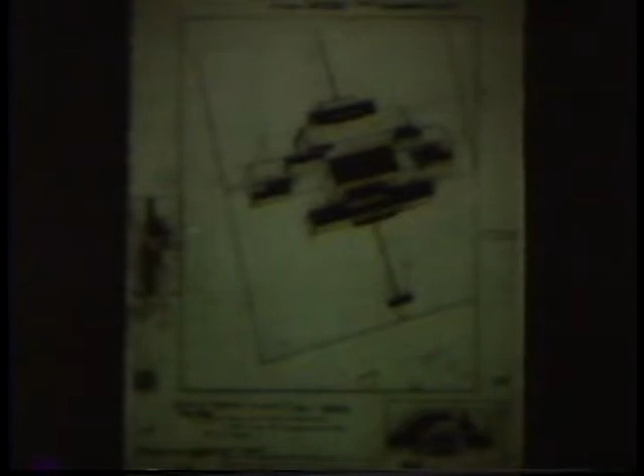Now we have here those two artistic movements from 1919 and 1920, Tatlin on one hand, Malevich on the other. Both of them saw that the revolution meant the opportunity to turn their purely abstract work into raw material for functional tasks, to take on board the social program and the constructive tasks it presented.

Let's deal with Malevich first. Here we have something now three-dimensional, which calls itself something to do with architecture, but which is still scaleless. It's merely an idea about certain ways of bringing volumes together, still without real dimension, without any real sense of what space, or therefore what time, it exists in.

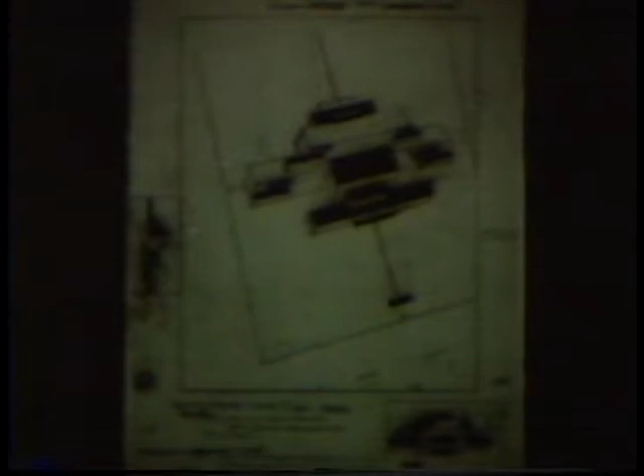Here, on the other hand, you see Tatlin. I'm sure you know this image, the tower that he designed, not built, I should say. It was an enormous structure in his intention. I won't go into what it was for.

Now, the most important thing for us about that tower is the statement he made when it was shown here on exhibition in Moscow. He made it with his students, and it was shown at a very important party occasion. They issued a statement called The Work Ahead of Us, which you can read in various books in English translation.

There were a number of points he made in this brief, one-page statement, which really set constructivism on its road and led to the concerns that became the architect's concern. First, he said the work we did before the revolution was without function, it was the work of artists. But now the revolution offers us a chance to use what we learned, to treat that as laboratory work for the solution of practical tasks in the new society.

In short, to turn ourselves into designers, but designers who recognize that abstract work, exploration of materials, their spatial properties, volumes, and how they can be brought together, is an essential piece of preparation. It's a kind of bank of usable information that is there when you tackle real design problems.

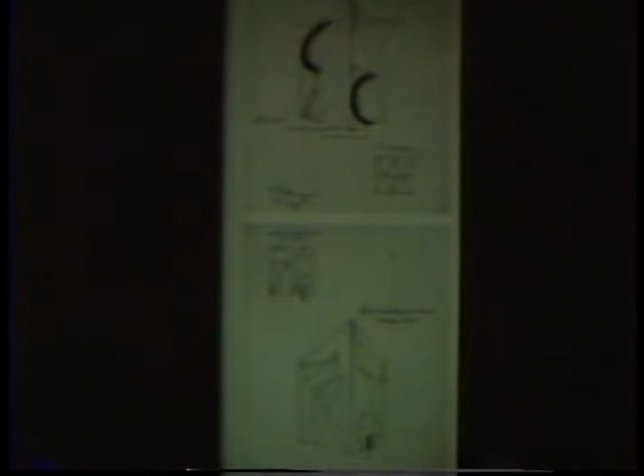Now, these chaps actually were in a bit of a muddle. They could see they were doing something different from before, but didn't quite know what to call it. They could see that what they did before, which used to be called composition in the art schools, was a bit messier - you sort of started somewhere, then did another bit, and it wasn't quite clear. You're building up the whole object or image as you go, with no clear relationship between elements, no clear indication of their spatial relationship and so on.

Now what they did to try and get themselves sorted out was hold a sort of weekly chat session, a little study group. They said, next week we'll all come back having done a composition - what they were already calling a construction - and we'll have a kind of crit and discuss these things, to see if it clarifies our understanding of what we're looking for.

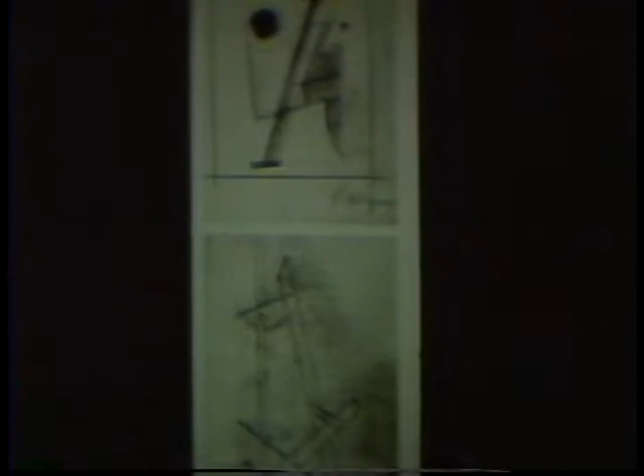It's essentially the people who believed in that who went on to become constructivists. But in the group there were people like Ladovsky, who became a very famous teacher of architecture, who believed there was still value in studies of visual psychology - sciences that a man called Munsterberg in Harvard was developing in America - as the basis for building a rational architecture, as they called it. That rationality was something aesthetic, to do with the perception and expression of form, not to do with how form and its function are logically connected.

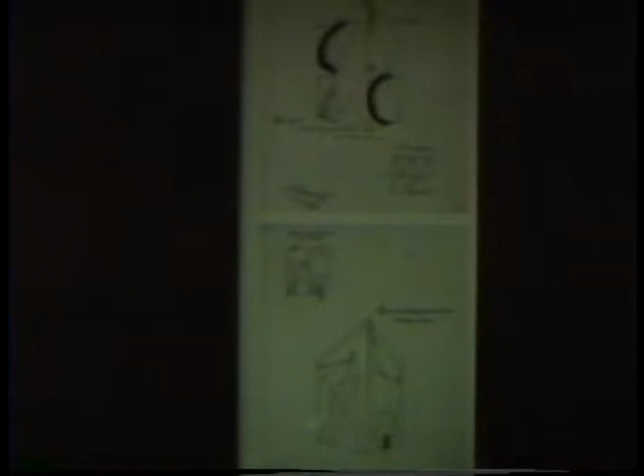They're concerned more with the end product, how it is built up. You can see here Ladovsky's composition and his construction are not awfully different - this is essentially a surface treatment of the same volume as he handles in his composition.

Now we pursue these two just a little, because these are the two key dimensions, the two key movements in Soviet architecture in the 20s, coming together in the teaching of the avant-garde school. Here you have Rodchenko doing the same kind of thing at larger scale, with these little constructions looking at the permutations possible with certain elements, certain rules of combination of volumes - building up a kind of grammar of the possibilities.

Here you have the students of Ladovsky, and you can see this is expressive form, essentially sculptural - some of these are student works, some are Rodchenko's, all student works in the Vkhutemas school. It's not clear quite what the relationship is - how these forms come together, which is primary, which is secondary, what is the extent or nature of their penetration.

And here you see, just for fun, these are actually groups of students - that's Stepanova, the wife of Rodchenko, and some of these little things are on the shelf in the studio.

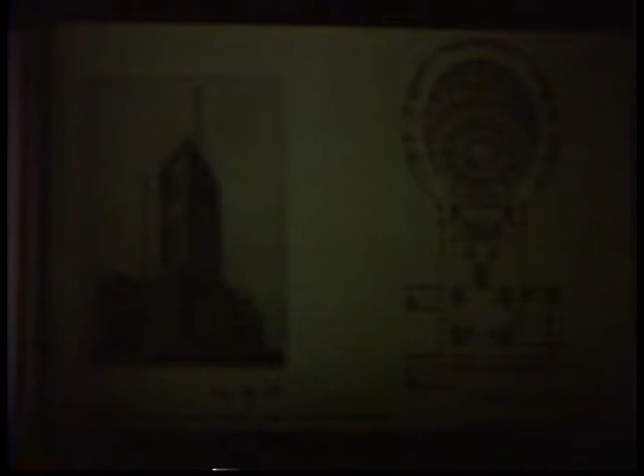You have from the same date, '22, '23, two schemes. This, you may know, is the Palace of Labor scheme by the Vesnin brothers, who were emerging now as leaders amongst the young artists, leading them towards architecture. It was a competition which I won't go into - they didn't win it, but this project got third prize. It was seen by the constructivists, the young chaps at the time, and particularly through the rest of the 20s, as the canonical building of constructivism. First time anybody had done anything at this sort of scale.

And for why? First of all, it's obviously a logical concrete frame - in purely technological terms it is coherently constructed. Secondly, because it was an entirely new type - it was to be a set of assembly halls for the new committees and councils of the working people, and it was without precedent. There had never been such a thing before. How would these assemblies come together? What would be the atmosphere? What would be the relationship between these groups? How would they form themselves into some kind of politically coherent operation? So they saw it as canonical because it was a new brief generating an entirely new and logically constructed volumetric composition, the plan form itself.

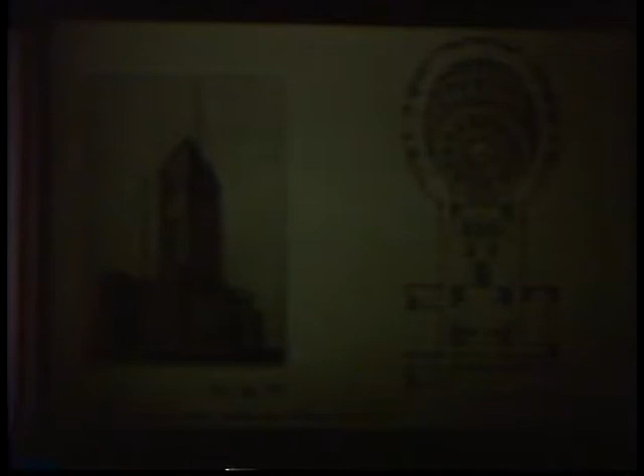Now here, this was to stand actually rather close to that one in the center of Moscow. By Krinsky, you see, Ladovsky's colleague. This is a skyscraper. Actually, the KGB is about here. This is just beside where the KGB is now. Composed entirely as a piece of sculpture. Composed to make another vertical in the center of Moscow alongside the historic vertical, to really communicate something about the scale and power of a socialist city in the 20th century within the historic fabric that you see here.

You can see it's fairly, well now I guess that's fairly trendy looking, but in the 20s it would have been considered dangerously unconstructive, I think particularly that bit. But it is generated by external and essentially sculptural perceptual concerns, whereas that is generated by the inner logic of the problem and how you build it.

And those two approaches, when we see the constructivist design model, they very much took on board the work of these rationalists. It had a role, as you've already seen. There was a point at which you refine and make perceptually expressive the form that you've generated, but it's not the primary generator of form.

Now, in '22, they'd had these discussions, sort of every Wednesday, or I forget what day it was, in this little group called INKhUK, the Institute of Artistic Culture in Moscow. And you can read, actually, in the Rodchenko book, which came out last year by a man called Khan-Magomedov, I'm sure it's available here, wonderful transcripts of some of their discussions. Actually, verbatim, they kept notes, kind of minutes of what they were discussing.

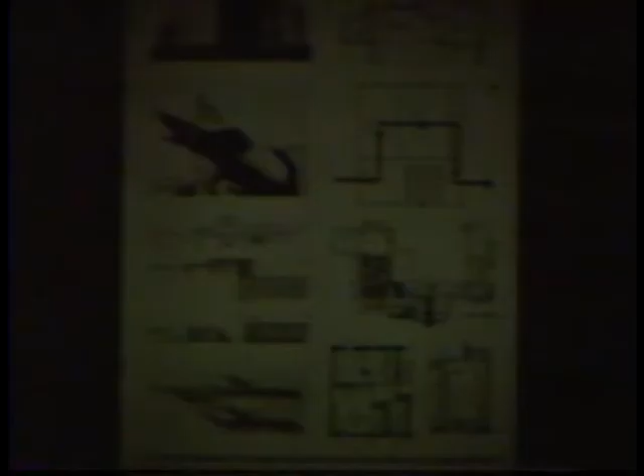And there's a lot of very interesting history there, which again is far more sophisticated than anything in Corb. It just kind of takes the bits he likes, about how there is a cyclical process of growth and decay of what he calls constructive periods, when you have new social tasks, new building technology, and they mature and then decline, and the process starts again. And you can see this through history and architectural history.

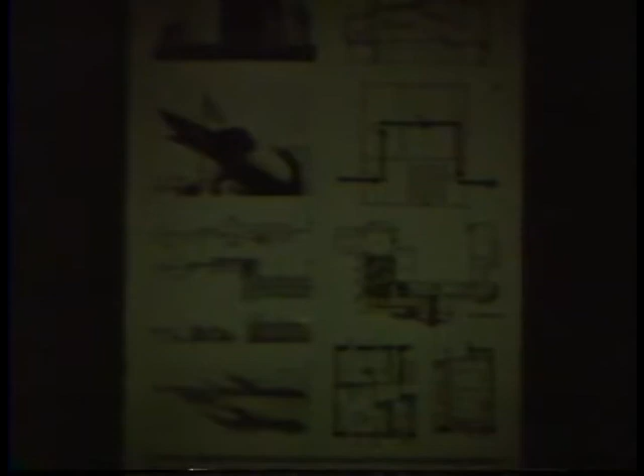Now here you see, this takes it a little further. Here you see the development of this idea in later work. This is a collage of certain things from '27. Looking at, here's the machine, here is a factory, applying these processes, which of course in Germany were also being studied, time and motion study, par excellence, they came from here, and were being used amongst much else in Ford factories, and they'd read Ford's books and they knew all about that.

And here you see workers' clubs and so on, studying kitchens in terms of flow and the economy of movement. And on that side, I just put on this, it's actually a poster from the great campaign that was going on in the 20s to get industry and particularly work processes rationalized. A Taylorist campaign, very directly inspired by the Taylorist movement here. And that was, of course, one of the stimuli to this.

This is quite nice, and the reason I put it on is, well, what it says is, let us take the storm of the revolution in the USSR and bring together with it the pulse of life in America and do our life with the precision of a chronometer.

Now there's a very important idea there, which is that there is a distinction between the technical wherewithal, the technical knowledge, the techniques, and political content and how they're used. And this is very much a theme of Soviet relationship with the Western world at the time, that we take the objective developments, but we don't take the political connotations, the political associations or structure.

So you have here the storm of the revolution combined with the objective technology available from the United States, and you work with this degree of precision. Well, this is addressing workers who don't even possess watches, and they all arrived rather drunk for work at about midday and thought that was okay.

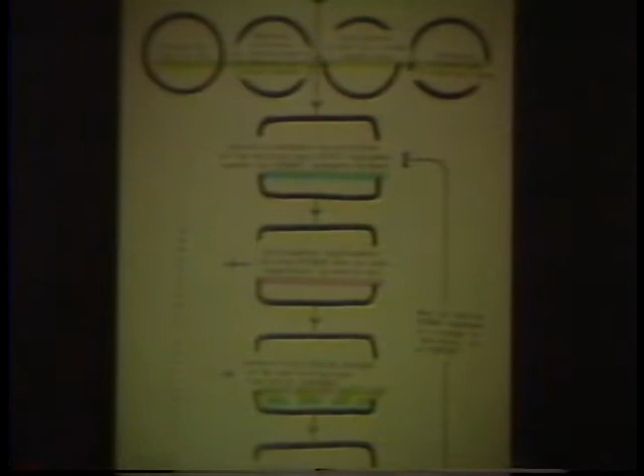And at the end, you have a logical building unconstrained by models handed down from the past, what we're all aspiring to always achieve in architecture. Very much argued through their papers in terms of the logic of the machine. Here, I just put these on in slightly more detail, just to indicate to you that there is more detail, and actually I've written about it. You can go and read the stuff in more detail in AD.

It was all presented in one paper, which is about education and the role of laboratory work as building up the elements of this model, this approach. You see, take the problem apart, first object, and so on, various things. Then you come on to the perceptual questions, taking on board there the work of the rationalists who actually were teaching in the same building as them.

Looking here, very importantly, at the elements of architecture itself, surface, volume, how volumes interrelate. This is making a clear statement of your architectural intentions through mastery of these elements of form. And here, very importantly, you see the types of transformation. And we start to refer here to the sort of work which Rodchenko and co. had been doing, which he had been the leader of, looking at how forms may come together and how you respond logically to a change in the requirements of your task. And then some things about industrial processes and so on.

Now, that's right. Here we have examples which I think bring home the point about the function of that when you get to design. To put it very briefly, having done that kind of thing, you are building up a vocabulary which enables you then to proceed logically at a larger scale in a design task.

A very important element of this work is focused on here, which is precision, quantification of the properties of space, of volumes, of architectural organizations. I don't know if I can focus it just a little bit more. There. Some very nice little graphics here, slightly suprematist. What this says is architects do not imitate the forms of technology, but learn the method of the engineer. That's another, as far as I remember, directly from L'Esprit Nouveau.

And much as they respected Corb, there's an element there of, if you like, warning to their students not to be quite so superficial about it. Now here you see a statement which says, architects, this is how to understand the materialistic bases of the aesthetic of constructivism. And the way you understand it is by quantification.

This is an engineer explaining how that form arrived, not by thinking this is jolly nice and all streamlined and things, but by doing sums. And by understanding the properties of form with that degree of precision. And some of the most outstanding work that they did, certainly in relation to the very short time they were operating, was in showing the implications of that kind of approach.

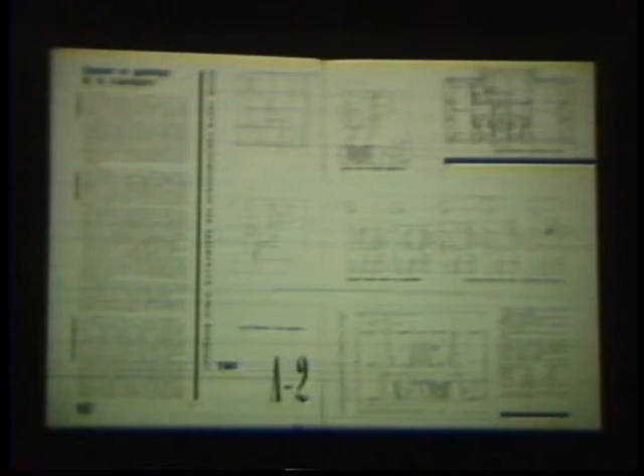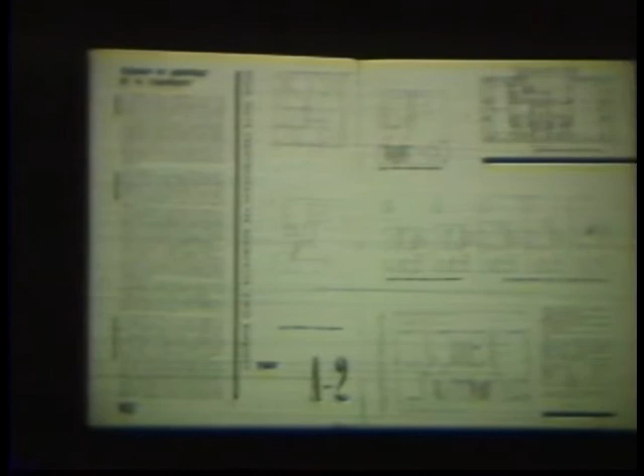Here you see them looking at housing problems. This was what was being built, conventional bourgeois apartments to stuff the workers in, because nobody could think of anything else. When building got going, this is what was going up. They took that with all its norms and the criteria the local council liked to apply and so on, studied certain of its properties, spatially in terms of flow, and produced a whole new set of possibilities for housing that took out a lot of the domestic functions, socialized them, and would help people to progress towards a collectivist way of living.

Here you see, this is a very interesting bit of work, looking at certain sections for housing. Here, this famous split section, which Corb later cribbed from them. Here, a more conventional one. Examining them in the terms that the city council liked to look at their plans, which was usable space to circulation space. And this one, not surprisingly, comes out the best, type F. And this becomes one of their major demonstrations of the results of their logic and of new ways of organizing housing. And they built certain projects demonstrating those types that they had evolved.

Now this is par excellence the building as catalyst. This is housing which has taken out many of the bourgeois family functions, most of the cooking, most of the recreational space, and provides it collectively in the building here. It's not totally collectivized, but it helps people to live in that way. It's a catalyst of social change. And it looks very sad here. It's a little bit in better condition now. That's where the double height units are expressed at the end there.

There are various other units here, really little micro apartments, helping people to get away from this notion of the family as the basic social unit and to think of themselves as part of something collective. These pictures were taken here when it was new in '28, '29. You can see the Corbusian pilotis. There's a nice toit jardin at the top there and all that. And the aesthetic, indeed, is somewhat taken ready-made and I think quite reasonably from Corbusier.

But the logic and the way of testing form, first of generating form by logical grammars and then testing the properties of alternatives, is crucial to their way of designing. Building up the first requirements and arrangements through this method. Now this is very important in a minute when we look at planning and we look at the complete change in their arguments at the end of the 20s.

Here they are. I'm afraid this is a page from microfilms, rather scratched, but you see the whole of an article where again they're conducting a mathematical argument. In this case, here's the diagram enlarged, against Garden City people who argued that you could scatter people in little houses as before, it was cheap. They would still go down the end, wherever they went, to collective facilities. It was only 5 minutes walk or 10 minutes walk. That the pipe lengths and so on were reasonable for the economic possibilities that were available to them.

Now the constructivists said, this is not only socially disastrous, you will never beat the bourgeois family psychology by this means, but more importantly, it is uneconomic in terms of time and in terms of materials. You must compress the people, or at least you must compact the people into these larger blocks where the facilities are there in the block. There's a nice piece of graphics here, says extensive or intensive development. This is extensive, this is intensive.

And they argue in terms of travel times, how long it takes somebody to get down to the place where they have breakfast, how long it takes them to get to the transport, and so on. And in terms of pipe lengths and surface of roads, and so on. Dynamic measures, as you see, measures to do with movement.

And they say very clearly at the time, this intensive solution has certainly some disadvantages. But in the present state of our technology, we are forced to accept those disadvantages, to live with them, because this is the optimum solution for our present state of particular transport and servicing pipework and so on. Now that is very important in a minute when they completely reverse their arguments.

Now just a little quickie to give you some nice, as it were, recognizable pictures. And to focus on that bit of work which is formal research, which they identified as the key to creating a logical and coherent building, but did not themselves do the most detailed work on. The most detailed work in this area was done by a man really quite unrelated to them, called Chernikov, up in Leningrad. I suspect you know about Chernikov a bit already. Several things I've been asked to sign indicate to me that certain of his things are circulating here.

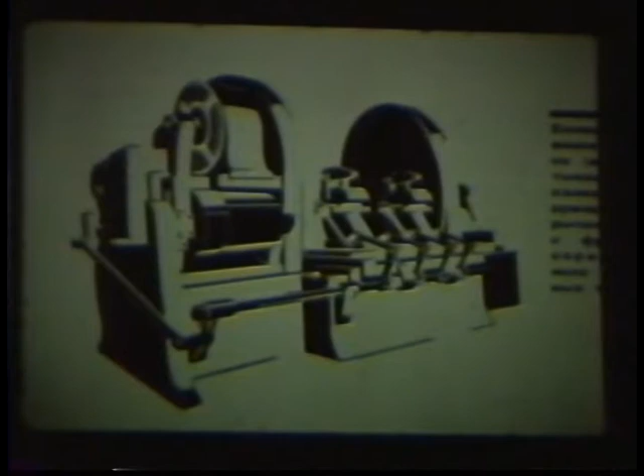Here's an extraordinary chap called Chernikov. He believes that in the machine there is a kind of logic which ought to be, as the constructivists themselves believed, the proper logic for their social philosophy, their political philosophy, and their state of development.

What we see in Chernikov is essentially a bringing together of elements of suprematism and constructivism. These are two of his books, from 1927 and this one from 1931. This is in fact work done earlier, both of them. I put them on because this symbolizes the suprematist origins of his work, and this, by its very typography, the constructive logic that he then developed. This one is called the construction of architectural and machine forms, and immediately you see these two things treated, as it were, in one breath.

Here's a summary of what Chernikov is focusing on, a subsection of the design process as understood by the Moscow constructivists. The aim of his educational program is to study the fundamentals of architecture in sequential order of increasing complexity through specific, clearly defined exercises. You study the elements of form first in a plane, lines and planes, then in space, surfaces, volumes, and very importantly the types of constructive joint, how forms may come together coherently by one penetrating another, embracing another, clamping, mounting, interlacing, coupling, and so on. Those are some of the other topics addressed in his discussions of design, new anti-classical aesthetics, the dynamics and aesthetics of rhythm, and so on.

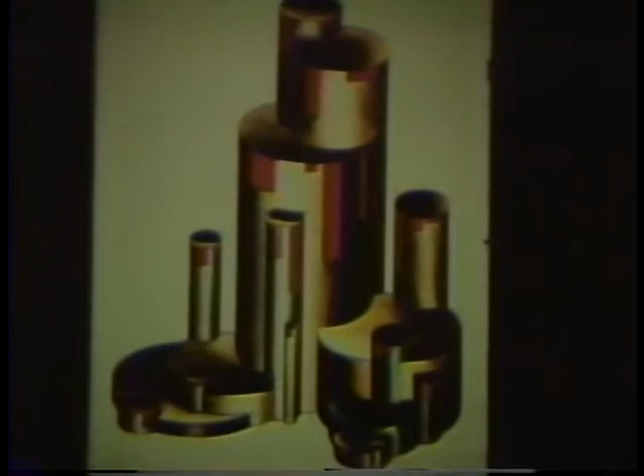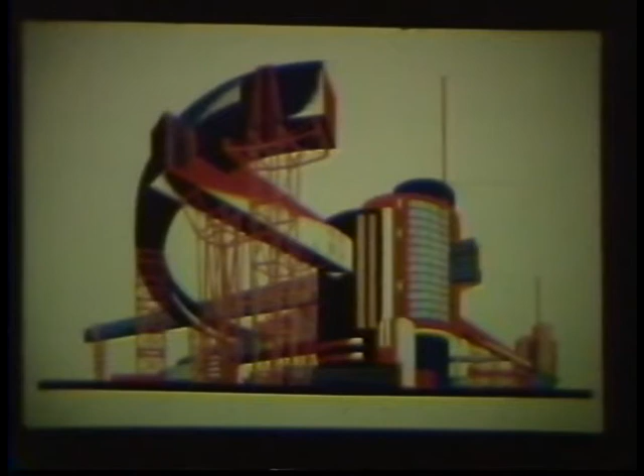I'm cutting this short a lot, but here, having developed a form, you would color it, learning to color it according to a certain science of the use of color and its expressive potential, with certain explicit intentions about a form and subsequently about a building. Now here again I put two purposely contrasted examples to make the same point as before, that no one aesthetic is particularly favored in this philosophy, this training, this approach.

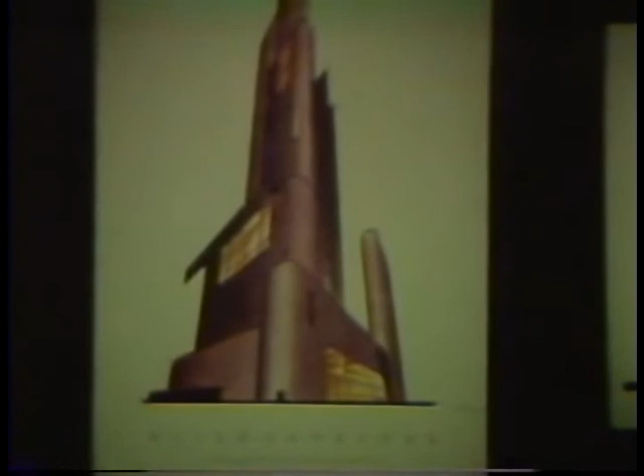These are both by Chernikov or his students, one never quite knows which, out of his books. Here obviously you have a thing which is in a sense non-constructive - the structural supports are concealed, it's a kind of Art Deco, a concern with surface, with certain kinds of dynamic play over a surface.

Here you've got an intensely constructive thing, and he agrees that such rigor is not always appropriate to the solution or the mood of the situation. But the parts are absolutely clear in terms of what they are structurally, how they interconnect, the materials being used and their general properties. So both of these and many others are examples of the approach - things you have to master, learning to use form with that degree of precision.

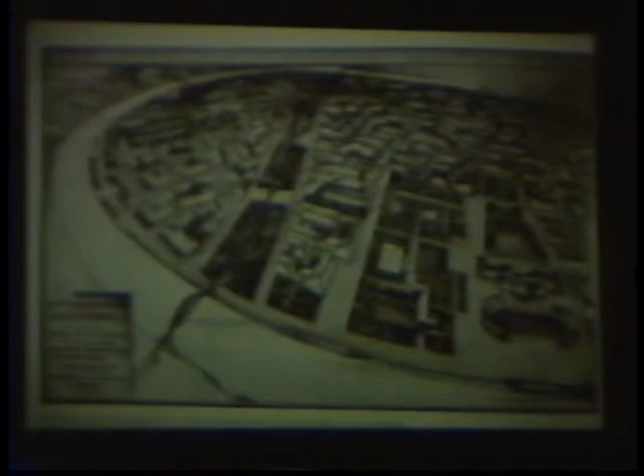Now, I mentioned before in passing that the constructivists changed their view dramatically - they argued one thing about density in the middle of the 20s, then argued something quite different at the end of the 20s. This is where we begin to see something like the same leap as between those two models - the deterministic mechanical model and the more probabilistic one we're more interested in today.

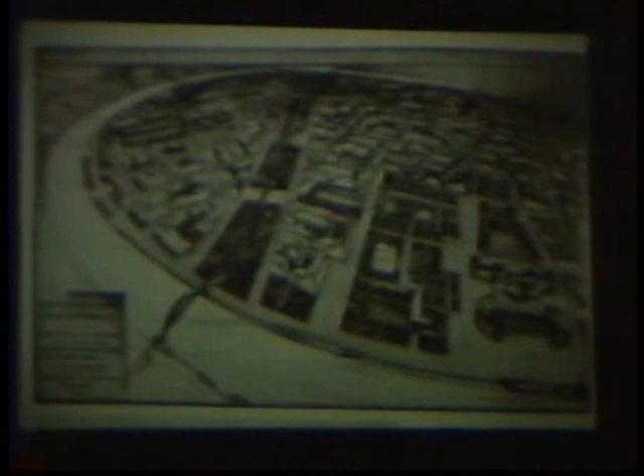This is just a little background - Moscow planning of the 20s. The 1923 plan by Shusev for a mild restructuring of the city. Here are parts of that developed by some of the students, here by Kolli, who later was the executive architect for Corb's building in Moscow. But you see here an essentially entirely conventional view of the city - it's a kind of blob with a certain inner structure. This is the way that the young constructivists learned to see it.

Now here again, this is microfilm, but it's the real thing from the Constructivist magazine, in the summer of '29. There was a lot of debate about the proper shape of cities, socialist cities, generated by the developments of the 5-year plan, which I won't get into. What was essentially happening was that conventional centroidal, blob-like cities like this were being built all over the countryside, more or less well, in crude planning terms.

These people saw that there was no real rethink going on in terms of what a socialist city should be, far less in terms of the implications of this kind of space-liberating, time-shortening technology. There was electrification going on.

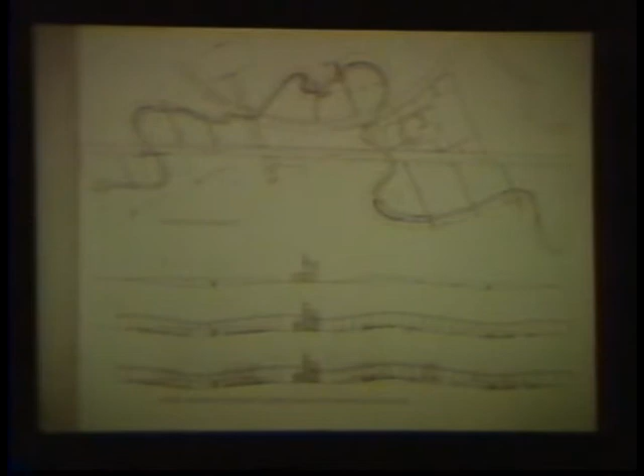And I think that one sees there already, in terms of this discussion of accessibility over time, of information being not transmitted through contiguity, the beginnings of the kind of information approach, the intellectual world, if you like, that we're in today. It was said at the time by the Communist Party: the constructivists may be right about the future, they said. Disurbanization may be the future, but it is not right for the psychology and the state of technology today.

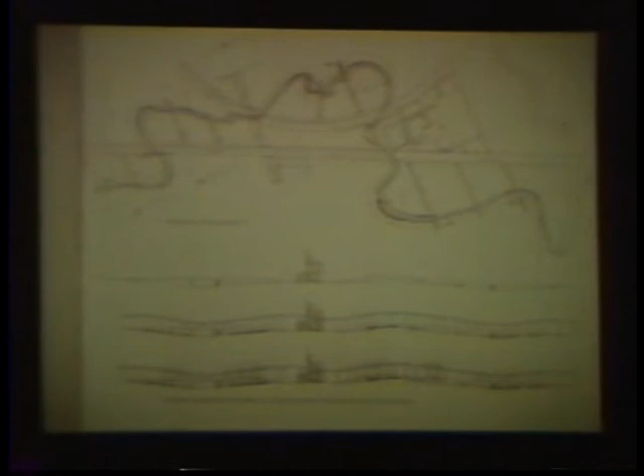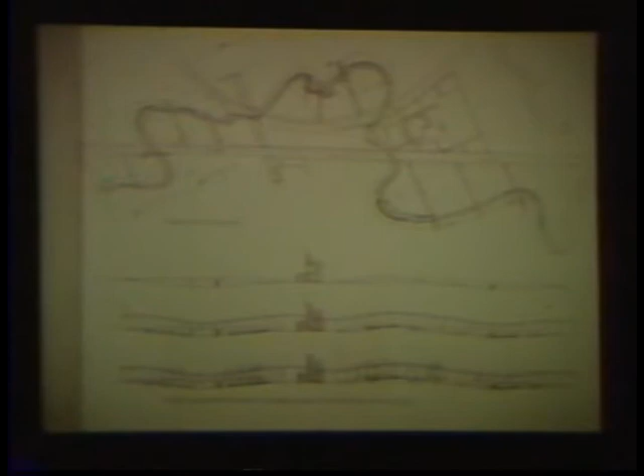Here, this is an interesting one. This is constructivists talking about how the city will evolve through certain states to a completely disurbanized, almost anodal network. This is a disurbanist state of society. This is the socialist pattern of settlement. This is what they inherited from the capitalist state, capitalist society.

And with that goes the presumption that that is, if you like, for the age of the machine, the first machine age, mechanical engineering, physical contiguity. This is the world where there is transmission at a distance of information, energy in a wire, not coal in a lorry, and where distance is measured by time.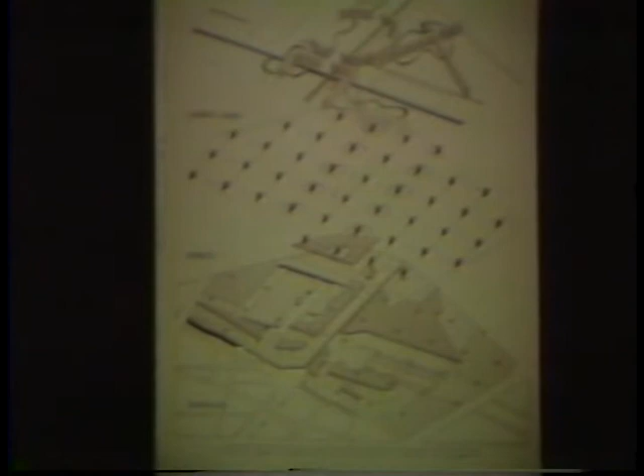Here I just put this on as a kind of example that we're familiar with today through this kind of work, of course, of these very clear distinctions between linear elements, nodal distributions of this kind of network of discrete options within a certain time frame, and surfaces, a kind of almost Chernikhovian analysis, of course: lines, points, and surfaces.

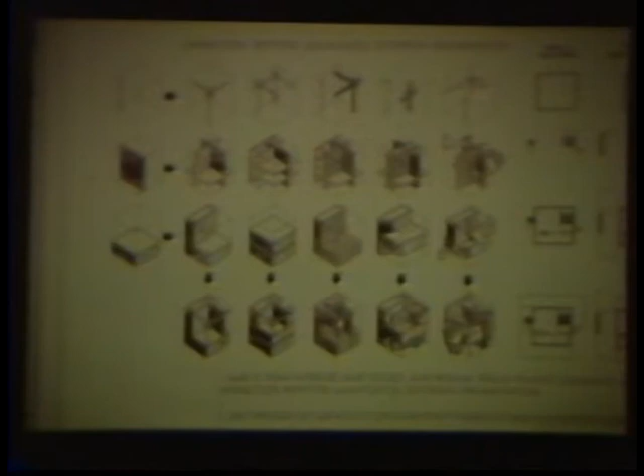Here, just to carry the thing a little further, we find the same, of course, vocabulary developing here by Tschumi: intersection, repetition, qualification, distortion, fragmentation, the sorts of things which logically you can do to a form.

And I just go back to that, really to make the point which seems to me the crucial one, that if you're looking in the ways we are now to make statements about a new kind of connection which is not necessarily physical contiguity, which is not logical mechanical structures of the kind we previously believed in in the modern movement, this sort of understanding seems to me to be still essential, and I'm sure this is why it's being so much used.

You need, as it were, to understand a constructive language in order to make a deconstructive statement. You have to understand what putting together is in order to say, look, it no longer is together. It may be separated in space rather than together.

The language depends on you understanding that in order to make for the frisson, the negative statement. Here again, there's just another idea. This is again, of course, Tschumi. The permutational idea that there are a set of alternatives, the principles of combination and transformation of the elements. And because you understand the logical way to put them together, you can make statements of a very tense and potent kind about how those kind of connections are no longer what we're on about.

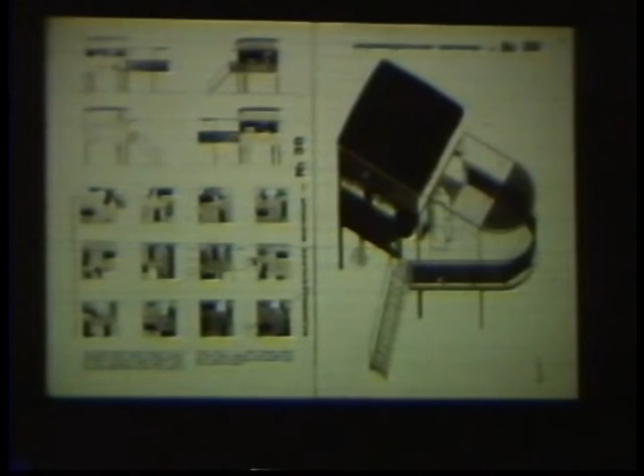This is constructivist. This is one of their little houses when they were doing this disurbanist thing, just to give you a kind of close-up. And the permutations for the organization of the space inside and so on. Super little houses. I always feel it'd be worth mass production of those and you'd make a fortune, but I haven't gone into it yet.